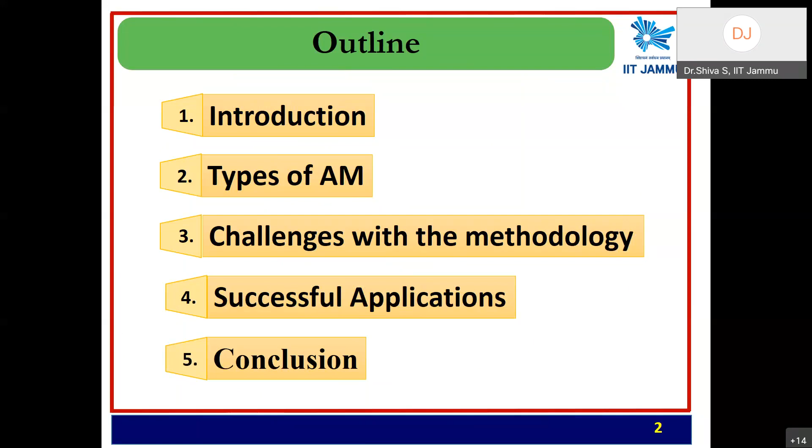So, to shed some light on this particular aspect, first I will be starting with an intro and the different types of AM which can be utilized, the challenges with the methodology, successful applications which are going to invite industries towards additive manufacturing, and finally the conclusion part. So generally in manufacturing, if you check, this is the normal design flow chart, or the design process chart in other words, which has been conventionally used by several industries for decades.

So when you say industries for decades, initially, once the industrial revolution started, slowly lean manufacturing started to take place, like effectively utilizing the labor, and basically the industrial revolution initiated. Much focus was provided not only on the technologies to be deployed for development and the products being used as output of that effort, but also sincere efforts were put on standardizing each and every method.

For example, if an industrial unit is there, there have to be certain principles and certain protocols to be followed. Anything related to these principles and protocols gave birth to this sort of process chart, where a new prototype is to be introduced from the industry. First, there will be detailed market research; it has to have clear-cut information about the customer's demand, what are all the types of expectations from the customers.

And after deciding the types and the demand, the next thing will be how hot that particular market is. It is not that we have certain requirements, we fulfill them, and we reach a dead end immediately, because when an industry is being established, it is a paramount effort and a huge money investment comes into the picture. So the first principle will be time is money. Whatever time they have, they must utilize it effectively without much wastage. That is point number one.

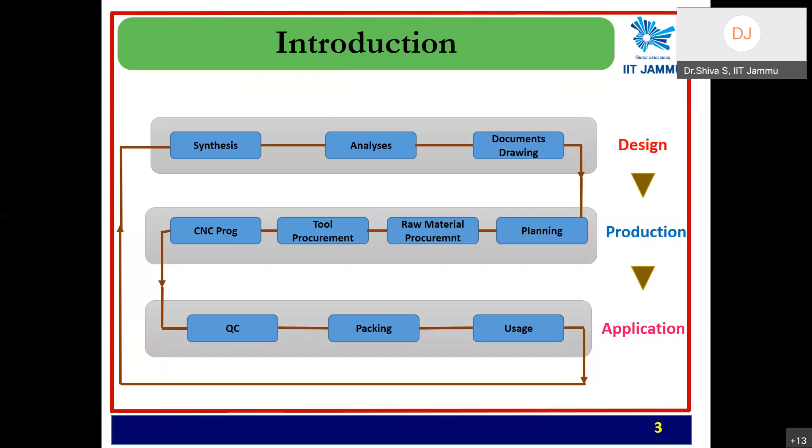So once you bring in additive manufacturing, out of these 10 steps, you will be surprised to know almost half of the steps are getting skipped. So this is a huge success for any industry, because we are not skipping these steps by compromising their job, but with the existing 5 steps, the steps which are cut short are also taken care of then and there, so that will save time, save raw material, and also save the overhead cost in the form of manpower.

So this is where additive manufacturing started taking the world by storm, and this is where a true justification was provided for utilizing additive manufacturing at an industrial level. So that is the point where the new revolution started taking place, it can be said. So once that is done, okay, how can this be done?

For example, in the case of additive manufacturing, the synthesizing job and the analysis job can be done by the design team initially with their CAD drawings, and immediately they can generate the CNC program, that is the G codes, which is used for printing an object. And all these selections like tool procurement will be off the show, raw material procurement and planning, they need not wait. It is all like fire and forget.

Once they order any bulk set of raw materials which has to be stacked, that is a periodic process. You need not go for raw material procurement for each and every segment. That will be part of a continuous flow.

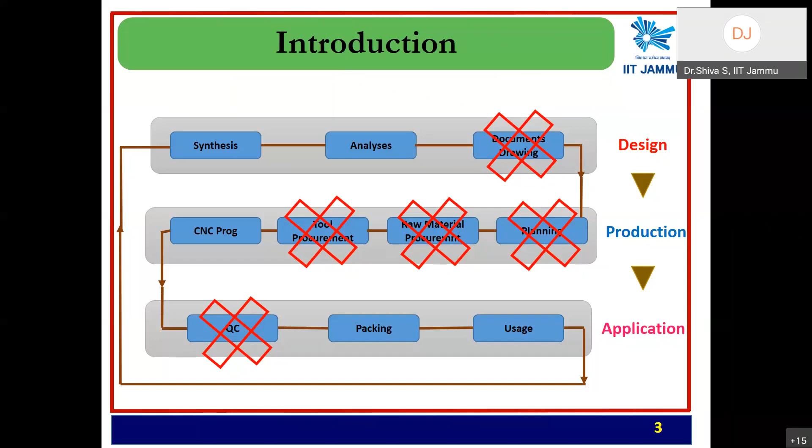And there is no requirement for any sort of drawings with BOQs and other details, because the drawing itself can be customized at any point of time just by altering the program. So this is how sequentially the cutting short of steps in the conventional design process chart came into the picture. And as an effect of those steps being taken out, we can see how this is being deployed in application successfully.

Once this is done, we have to check what are all the basic facilities that we need to utilize while using this additive manufacturing, or rapid manufacturing. We need a proper high power laser, which is basically a CO2 source, Nd:YAG source, diode source, or fiber source. And then comes the material feeding system, wire feeder and powder feeder, followed by a CNC workstation, which is 3-axis or 5-axis.

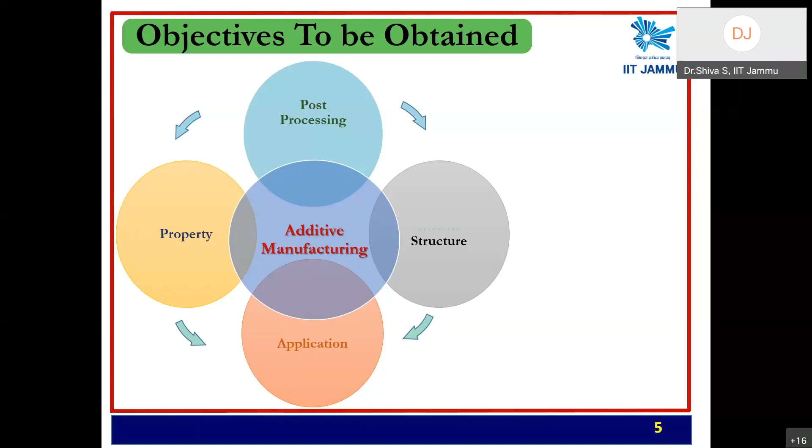Because this is the success of this particular process. Unless this is done, it is not easy to leave the shop floor. And finally, application—so this is all interrelated with detailed analysis, and each segment has to be met.

Mostly, preferably, we have to go with spherical powders, ensuring they have a good packing density. This packing density will be essential and helpful when building any component which is porosity free.

If you are precisely aiming for porous components, that is a different story—you will concentrate on the strength and weight ratio, which has to be comparatively low, and then go for a porous structure. Apart from spherical, there are also irregular shape powders and flake type powders.

In 3D printing powder fabrication, the engineers mostly focus on utilizing spherical powders, and the methodology in which these powders are fabricated also plays a crucial role. Generally, gas atomized powders are used, in such a way that more spherical powders are obtained from the raw material.

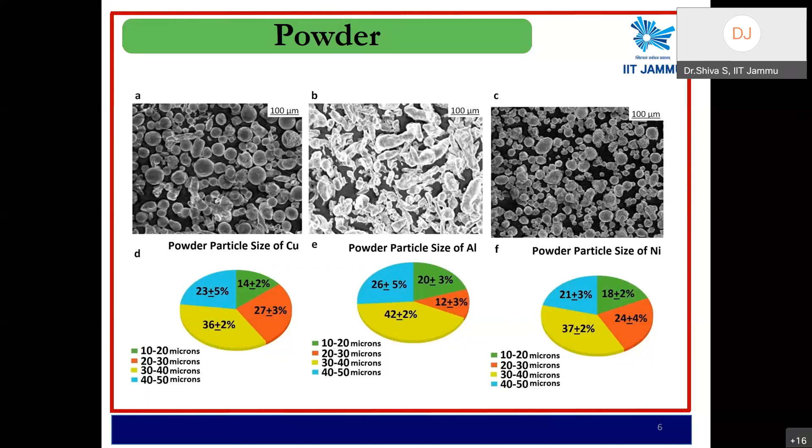In order to improve this percentage, you have to ensure the scanning speed and the feeding rate are optimized such that they work along with each other and maximum deposition is possible. This is one way of choosing the powders.

Next comes the concept of alloying. When you talk about solidification of structures, you have the powder particles, the heat sources are impinged, and depending upon the absorption coefficient and reflectivity of the powders, a particular percentage of that heat source is obtained within the powders.

This absorption and the eventual transformation of heat along the powder particles leads to the melting of the powders. This melting process is where the Marangoni effect comes into picture, and a proper melt pool is formed.

This melt pool has to sustain for a while in order to provide adequate nucleation process, which will be the step for the birth of microstructures.

It doesn't mean that once fabrication is done without proper alloying, there's no point in going for this sort of 3D printing — but obviously you cannot expect the strength. Of course, sintering-based works are also being done and they are promising in achieving certain strength.

But alloying a component, mixing with the composition, or varying the experimentation with the composition, and as a result tailoring the composition — what is the change in the property. This sort of analysis and flexibility in engineering the nature of the component may not be available if we are not providing sufficient heat and sufficient scanning speed.

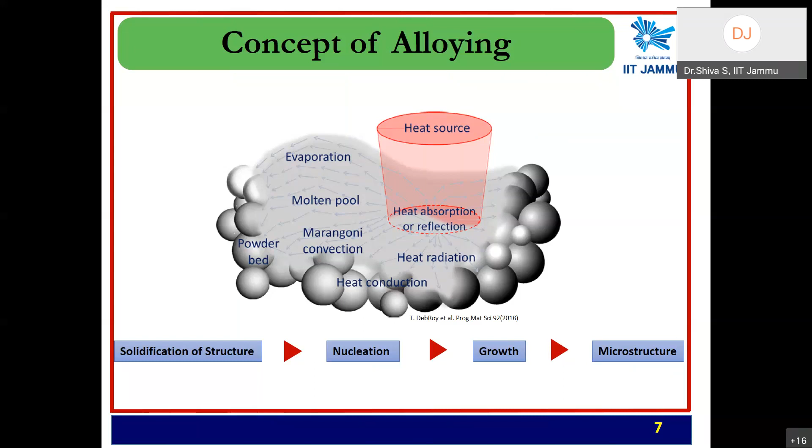That will eventually determine the final microstructure of the product, which is the first source for whatever property we are expecting. This is how the complete engineering of the microstructure, and these are the steps deployed for this work.

Now that we have decided the types of AM and discussed the alloying process utilized by AM, what are all the challenges or barriers that create hindrance for us to achieve our goal?

Loss of alloying elements is something that happens when we are not homogeneously mixing the alloy, or if two or three elements are clubbed together to form a particular alloy — the percentage and composition of that alloy varies depending upon the nature of the flow and the process in which the powder meets the heating source. So loss of alloying elements is always possible in any additive manufacturing technique.

Followed by porosity and fusion issues, because there might be certain elements highly sensitive to oxidation in the surface atmosphere, and these oxide gases get entrapped within the solid structures, eventually leading to space and voids, which might pull down the quality of the product.

Once alloying and porosity are attained as per requirement, the next challenge is surface roughness. When there is too much surface roughness, the crack propagation point starts at that particular level itself, and if we are not addressing this issue, lots of surface cracks and delamination effects happen during the alloying process.

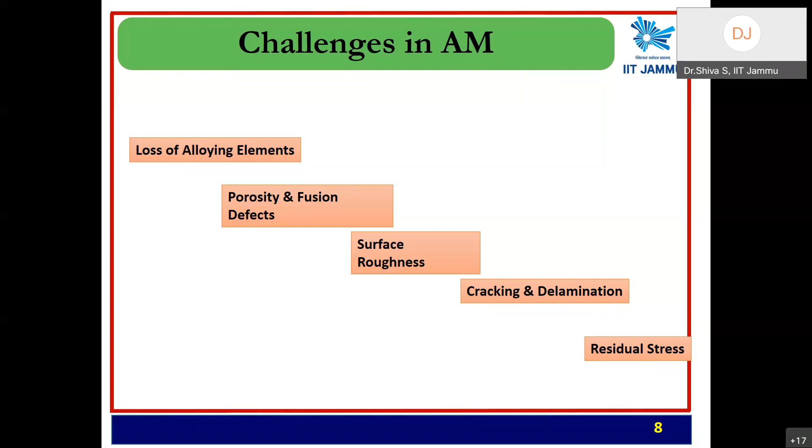Also, since the laser tracks are frequently induced or impinged on the deposited layers in a layer-by-layer process, you will find a rich accumulation of residual stress in the alloying element.

This is the conventional DED technique, a laser additive manufacturing technique, where co-axial feed powders are utilized. It is passed through the hopper, as you can see in the top left image, initiating with a dual powder feeder. This dual powder feeder facilitates the alloying of the final product, either in the form of two pure powders, or you can go for a pre-mixing process, where you alloy them using ball milling or a tabletop pre-mixer, with the powders pre-alloyed before feeding into the hopper.

Once this feeding process is done, once you pour it into the hopper, you will find that argon gas is gushing through the hopper. This argon gas is not only acting as a carrier gas, but also, once you shift the powders from the hopper towards the deposition booth, any chance of contamination and any chance of oxide formation of the powders will be efficiently prevented.

So this is how the process is initiated, and the powders are fed through the tentacles shown here in the video, the metal tentacles. These tentacles are directly connected with the powder feeder, and the argon gas is acting as a carrier gas as well as a noble gas, creating a controlled atmosphere.

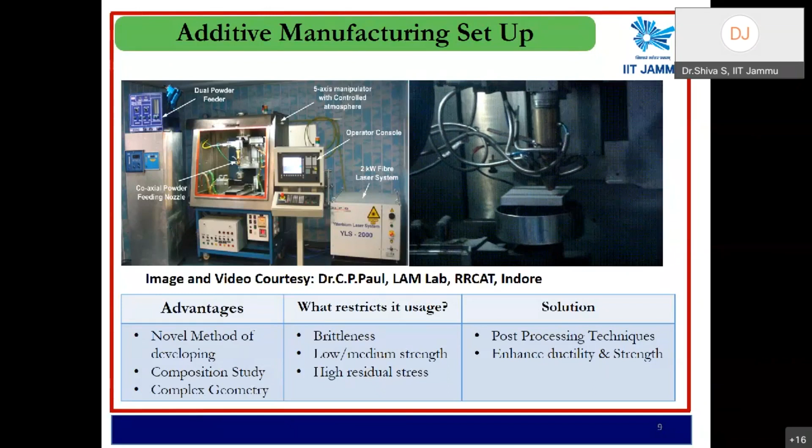See, actually, there are two things we can see here. I will tell you when you see this particular metal. In this powder-based technique, either direct energy deposition or SLM, there are certain requirements, like the previous participant asked, if you need to build implants, implants are widely made with porous structures with adequate strength and light weight, because when you're pushing an implant inside your body, it doesn't mean that it should always cope up with the weight of the body. So we are forced to build porous structured implants to meet up the application. So when you need porous structures, laser based applications or laser based deposition techniques are much more efficient and easier to fabricate the porous structures.

Whereas the wire based one is widely used for bulk structures. For example, if an object has to be deployed, if you are going to replace an object which is conventionally manufactured and forged, and you're looking for some sort of replacement in that particular application, there you need almost zero porosity to be tolerated. You cannot tolerate much porosity, because once the load acts, that itself will initiate the failure. So to prevent that, when we are going for bulk structures, we can obviously go for this wire-based additive manufacturing technique.

And second point, like you said, raw materials and green manufacturing. Slowly, the world is moving towards green manufacturing. In green manufacturing, wastage should be less, and maximum utilization of raw materials is motivated. So for this particular objective, wire-based works are much more efficient than powder-based works. So these are flexible options. It's like a buffet. It's up to you for your application, which one you are going to opt for.

Well, actually, in this wire-based technique, the material is deposited by a welding technique, I think. A welding source is used. It is not precisely welding. See, when you say welding, this is a good question. So basically, what is the difference between welding and this 3D printing? That's what you're asking, am I right?

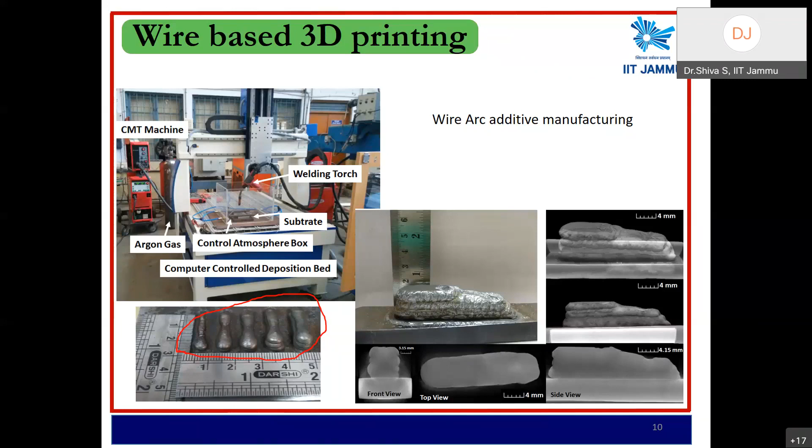So going ahead, we will be finding the spraying technique. This is a novel method which is fascinating many users. Spraying, as I said, is widely used for surface modification in the aspect of coating, and these coating techniques alter the surface of the product efficiently for corrosion resistance, wear resistance, and to improve strength, like diffusion based coating such as plasma nitriding.

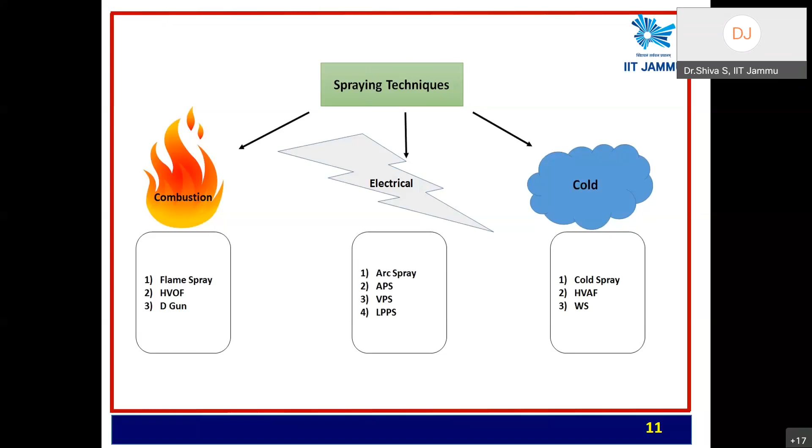So what is this de Laval nozzle? How it functions is, it is nothing but just a compression and expansion nozzle, a normal compression and expansion nozzle. But you will be really surprised to know that this small compression and expansion nozzle is creating such huge magic which other conventional manufacturing techniques are not able to meet up with.

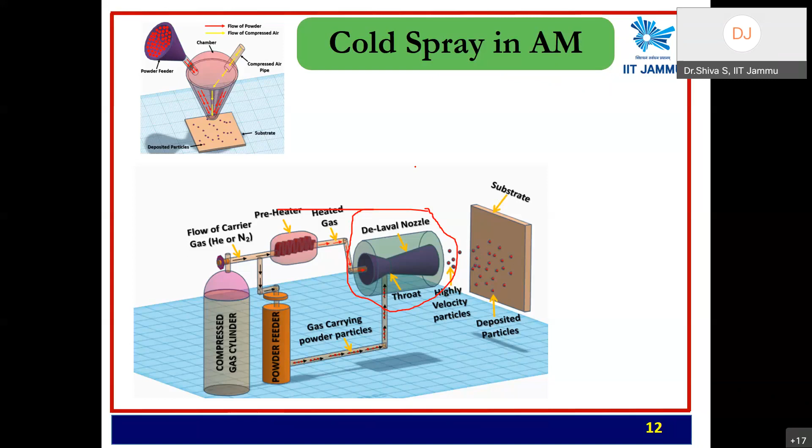So our objective is not just to impinge the powders. We have to create an alloy. Unless we create an alloy here, you are not going to have the material property that you are looking for. You get the point. So this particular technique is something you will be utilizing with a further heat treatment process. Like this is an actual setup.

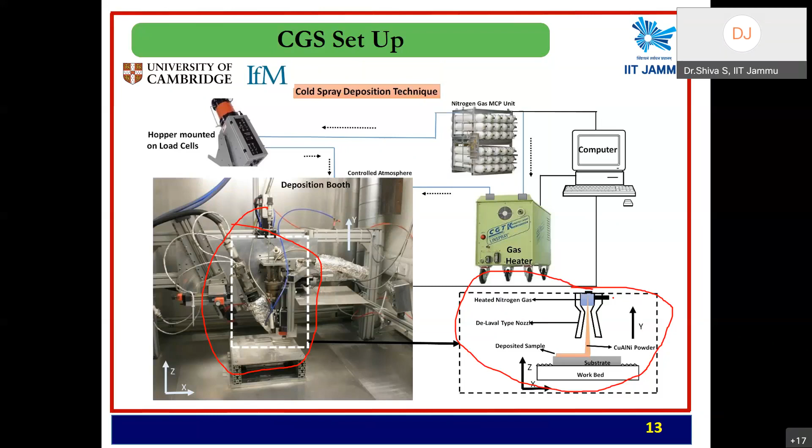You have the nozzle and you see this black input where the powders are efficiently fed in. As the nitrogen gas heats the powders, you see the expansion taking place in a much more efficient way. And as this expansion prolongs, you will find that efficient track deposition is taking place layer by layer. So this is the schematic diagram of the de Laval nozzle being used.

So it is basically a convergent type where the powder mixed hot particles are compressed with nitrogen gas and fed along the converged side of the nozzle. And as they pass through the throat, that is the point where the maximum amount of compression that can be built up by the gas is being fed into the throat.

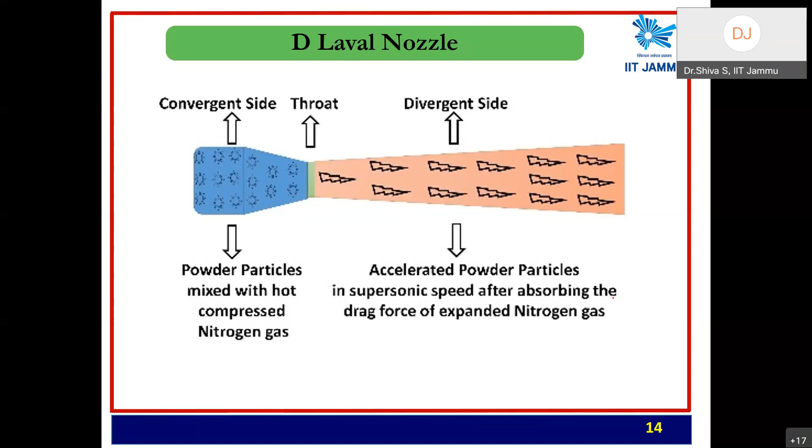And immediately after the throat, you find the divergent section where the actual acceleration of particles, that is the expansion of the gas, nitrogen gas, generates the kinetic energy, and that particular kinetic energy gets drifted on the powder particles, and that acceleration eventually assists in impinging and coming out at that high speed. You can see. So this is what again and again I'm saying, that the high speed at 2.1 Mach is the point where actual success lies.

Unless you are meeting that maximum speed, the impingement of powder is not going to be as easy as it is shown here. So to have that impingement done much more efficiently, you have to ensure that the standoff distance between the nozzle and the substrate is optimized.

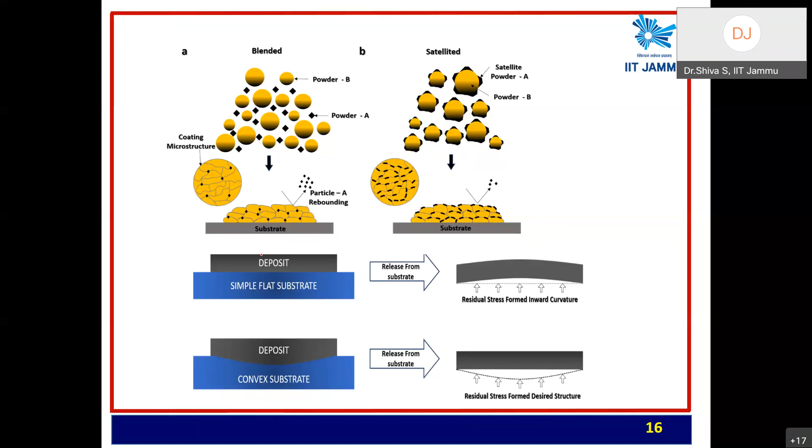Of this cold spray, you can see the tracks here as shown, with various angles, the number of tracks being deposited and their dimensions. You can see this here - the dimension is such a way that they are almost very sharp by nature.

You can see, if it's 20 mm per second based deposition, you find it here - the peak is very, very sharp, almost like a perfect triangle. If you have this, the biggest drawback is that you will not have sufficient overlapping successfully done. So what happens here is you have to ensure that this meniscus formation stays as low as possible for efficient track deposition. That is where the speed of the powder, like 200 mm per second, comes into play.

Now next comes the angle of inclination. So when we have a proper angle of inclination, the meniscus formation is supported. All this is also a type of optimization which is done, and this can be done either way. You can see the image at the bottom here.

It is an as-fabricated component, and you desire to have these two extra machined attachments here. So how do we do this? When we want sharpened edges like this, what we do is build the actual structure plus some extra deformed structure, so that by further post-machining process, we can remove that undesired section with the deformed shape, and the actual desired shape can be easily obtained. But this doesn't mean that once fabricated, you can directly utilize it in the application - if you do that, you will have the biggest disappointment, because the object will not function, since there is no alloying at all taking place here.

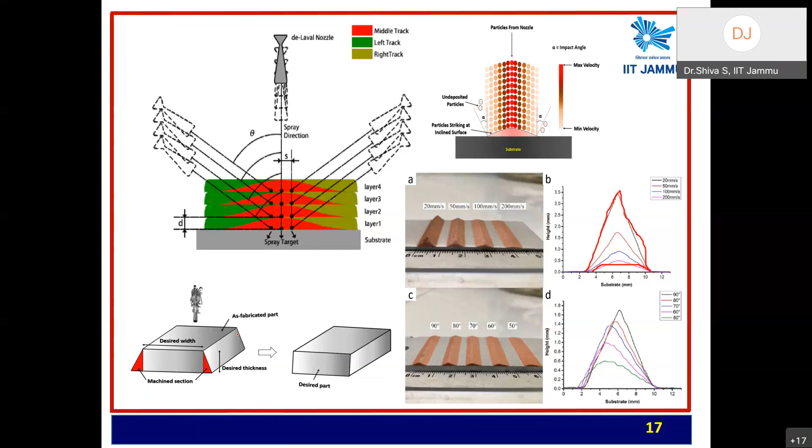Next comes the pattern of deposition. The pattern of deposition can be bifurcated. This is very common for all types of additive manufacturing techniques, whether cold spray based or laser based. You will find these techniques are either unidirectional deposition or bidirectional deposition. This unilateral and bilateral deposition basically justifies the amount of residual stress that each track deposition has, because you cannot allow too much residual stress to accumulate between each track, as that itself will motivate debonding within the tracks. So in order to avoid this, you must ensure that the track deposition you are opting for is unidirectional or bidirectional based, and that cross section has to be analyzed so that efficient deposition can take place.

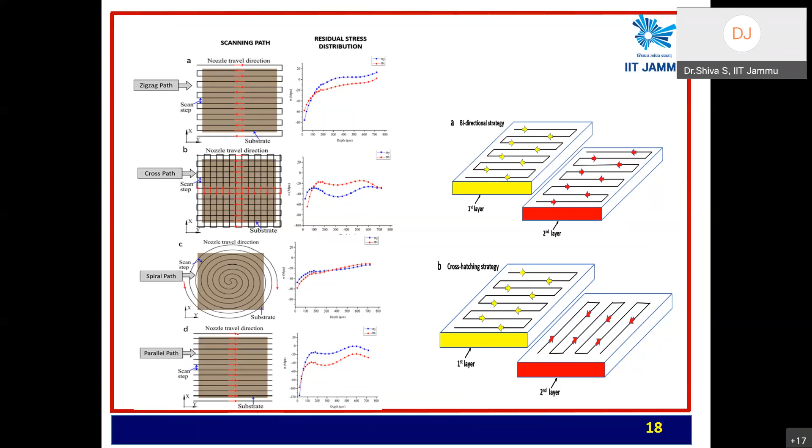When you come to this cross hatching B option shown here, you can see the first layer is a bidirectional deposition, and the second layer is also a bidirectional deposition, but the pattern is different. All these attempts are basically done to ensure that the deposition is done without any porosity or void formation, but with high packing density. So these are the ways in which you can maintain high density within the object.

So this is the difference between the types of de Laval nozzles used for spraying guns in the process. These process parameters are the widely used process parameters in and around cold spray for efficient deposition to take place, and this comes into play in case of industrial applications. All these applications here which are used, you can see, are higher end applications which take lots and lots of painstaking effort to fabricate.

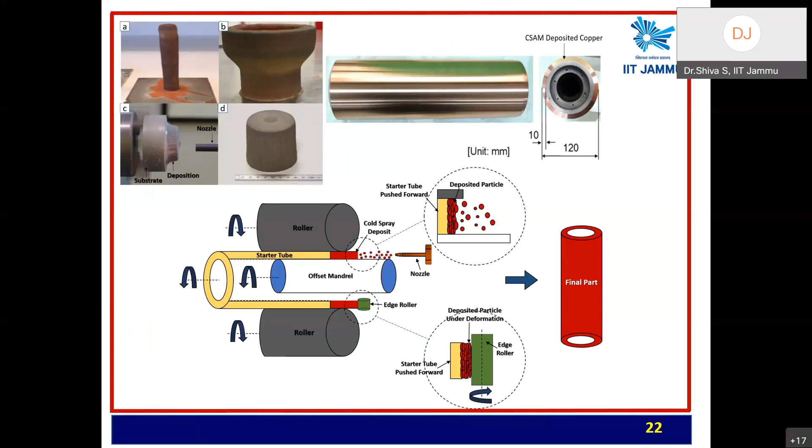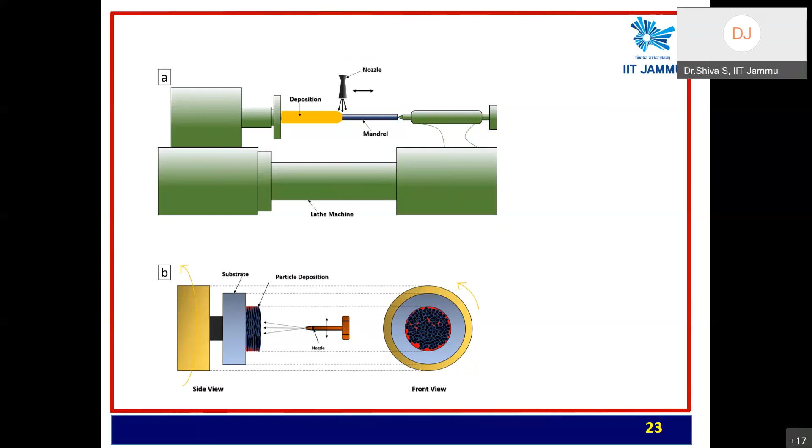And similarly here, building structures using a lathe-based setup, where the component is fixed and you have the spray gun positioned at various angles, and the entire setup functions accordingly. Even though it operates this way, we will be finding that the enormous pressure impinged through the nozzle will not allow wastage of powders to take place.

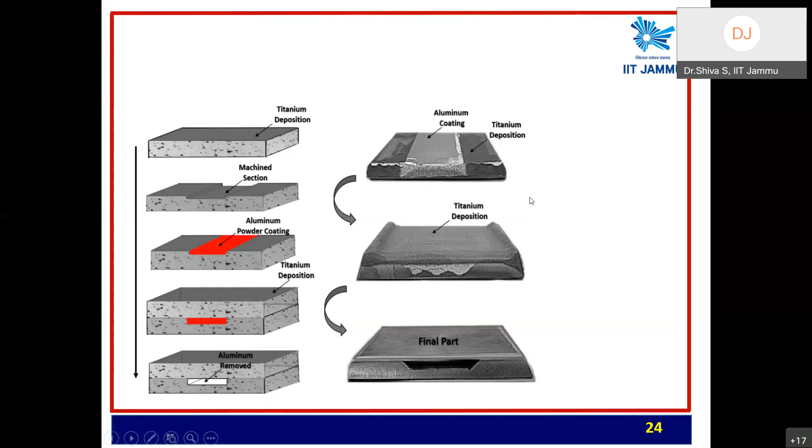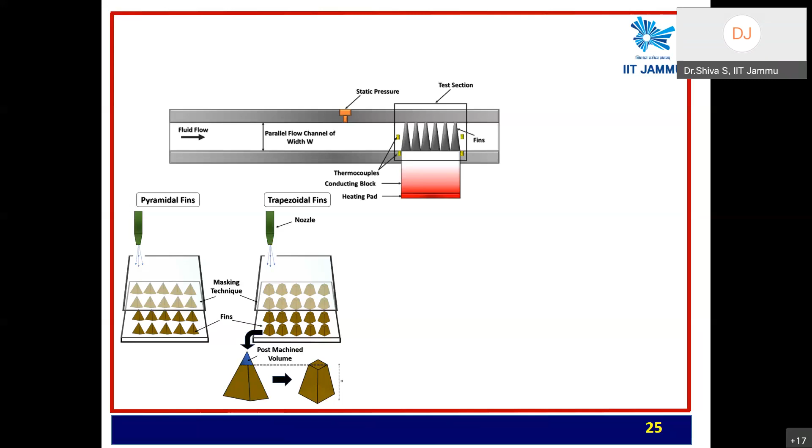Apart from this, yes sir, what is the temperature required, like the temperature that is to be achieved?

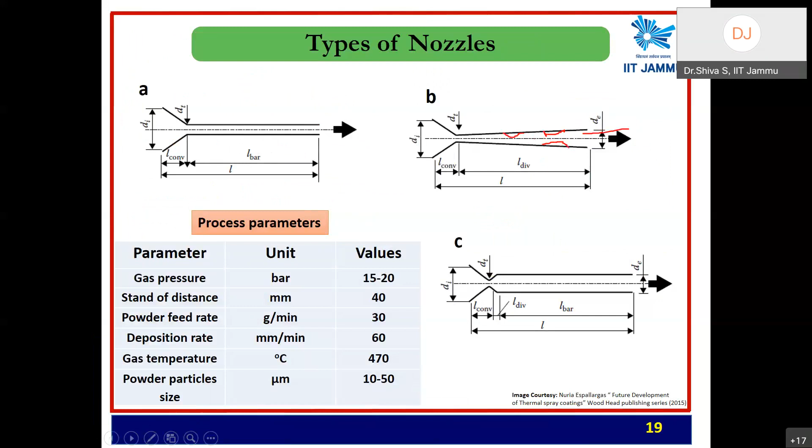The thing we have to ensure is that once you are depositing using the deposition gun with the de Laval nozzle, when using the gas, we have to ensure that these powder particles completely melt and get exhausted out of the gun. If we allow improper heating, the powders will start to clog inside the nozzles, and that will not allow free flow of powder. This clogging effect will take place. So we have to ensure the gas temperature chosen not only melts the powder, but also that the transportation from one point to another happens very smoothly and swiftly.

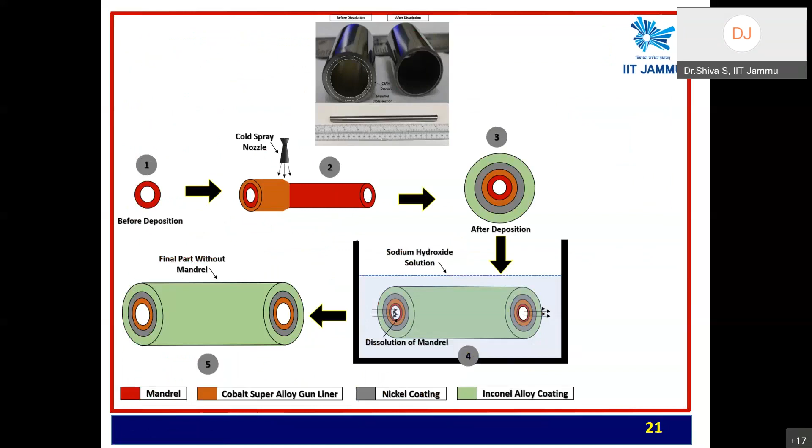Have I answered, sir? Yes, sir. Thank you, sir. Thank you.

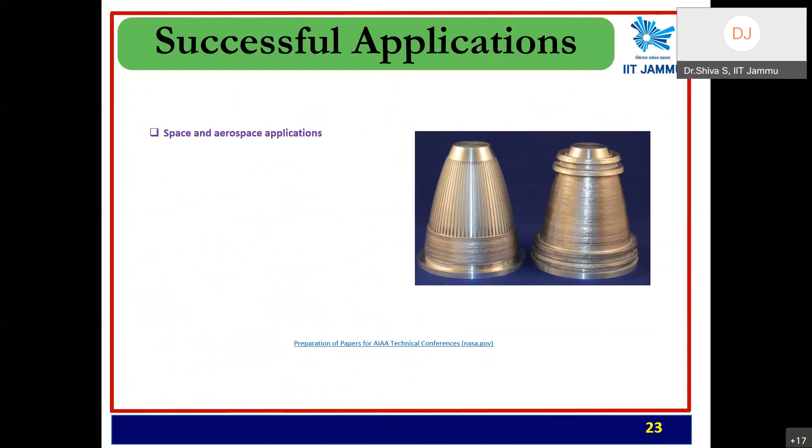Space and aerospace applications are widely used. You can see propeller nozzles used for space applications, which are completely manufactured using cold spray. Tool and mold making is another area — for casting, you have to make a lot of molds, and those mold-making machines are also done using cold spray based additive manufacturing.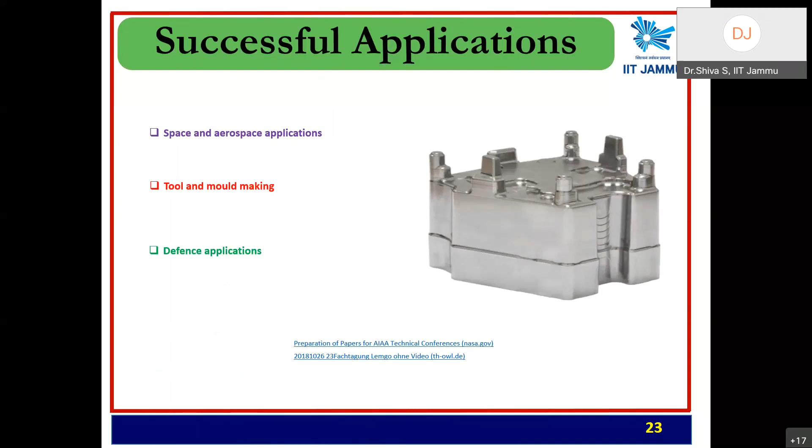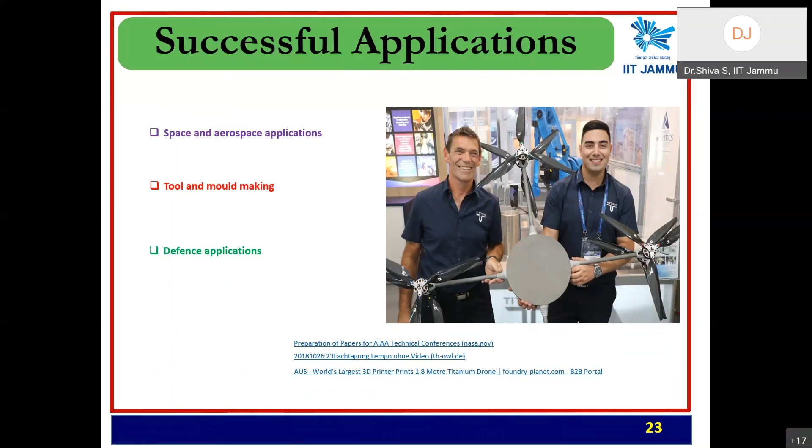In defense applications, cold spray based additive manufacturing has been successfully utilized for making drones. These drone structures are used for surveillance in defense applications, and also as permanent magnets. These magnetic structures are used to chuck two parts much more efficiently compared to normal couplings used for joining pipes. So these permanent magnetic materials are also much more efficiently 3D fabricated using cold spray based techniques.

This is one such work I would like to show — shape memory alloy based work which I carried out as part of my research. It is a functional material widely used for functional applications. You can see this actuation: on application of heat, the actuation takes place. The material remembers its shape and just returns to that shape.

For bulk applications, you can also use shape memory alloys for smart tool holders, where you apply heat and it starts to clamp the tool even more tightly. As an effect of clamping the tool more tightly, there is less vibration taking place, and the heat generation at the tip of the tool due to vibration can be substantially reduced, increasing the life of the tool.

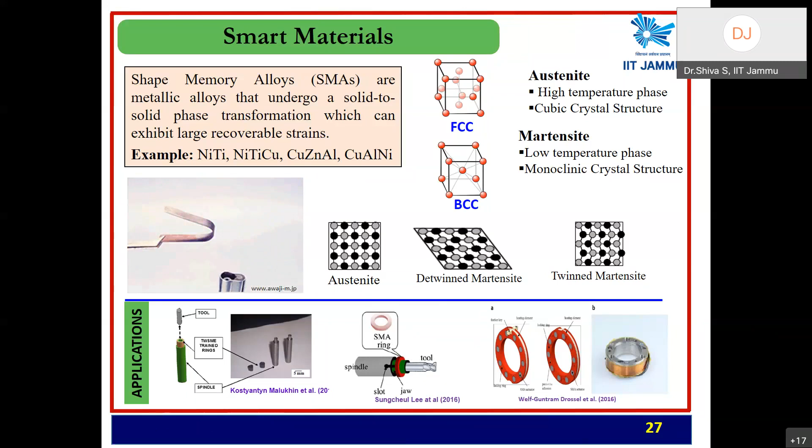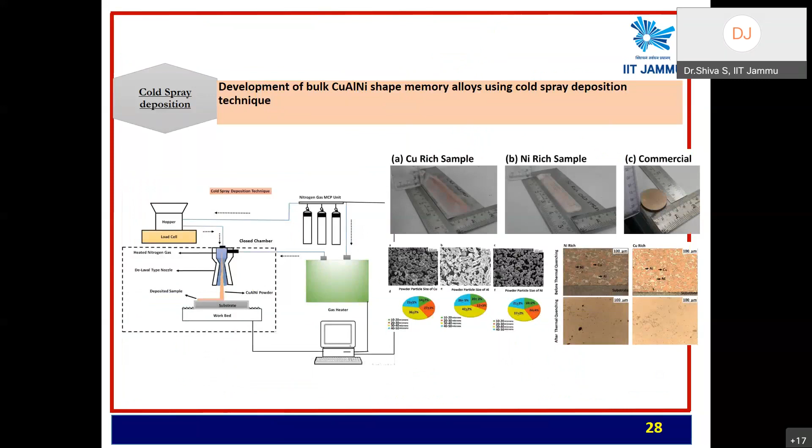These are the works done as part of my research, and these are also shape memory alloys which were developed using a cold spray based process.

Coming to the conclusion, I would say that cold spray, with more awareness, can be widely used as a good 3D printing or additive manufacturing technique. Development of standards across all types of additive manufacturing is being actively done across the world, and that is one particular area of research which can be well explored.

Developing standards will help us counter current challenges like brittleness, overheating, void formation, and defects like porosity and crack formation. All this can be prevented once standards are formed, and if we successfully develop standards and counter these challenges efficiently, there will be error-free components fabricated much more frequently, and as a result the reliability of additive manufacturing in real-time applications will be much more effective.

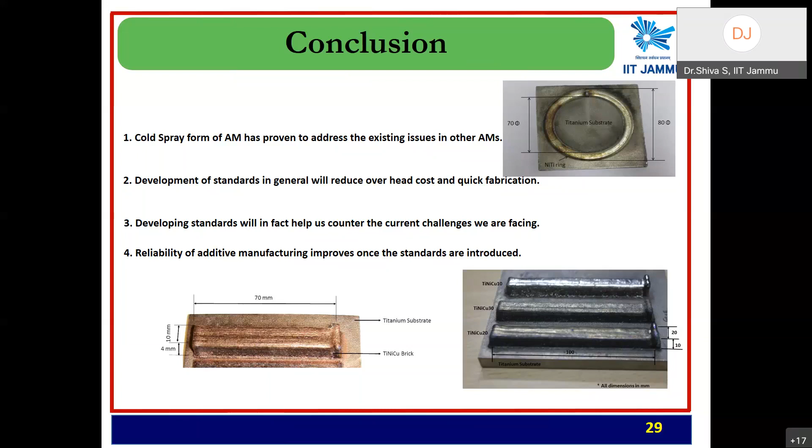So that is why we are much focused on developing standards. When you talk about additive manufacturing, this is our research lab — my research lab at IIT Jammu, the Laboratory for Advanced Manufacturing and Processing.

So here we are, soon about to have an additive manufacturing setup, a 2 kilowatt fiber laser based indigenously developed system where you can 3D print metal components, and also a cladding head where using a chuck for joining applications, the same system can be used. Similarly, there is a wire arc additive manufacturing system, CMT based, and the same laser-based system will also have a wire feeder to efficiently deposit tracks. So one machine can do 3 different roles - that is how we have locally customized these machines.

Apart from that, we use high power pulsed lasers for laser post-processing techniques like laser annealing and laser shock peening, where conventional compressive stress inducing techniques are not much successful. We generally use this sort of technique for countering such efforts.

Currently we are handling projects from ISRO, DRDO and DSIR. In ISRO, we are working on high temperature, high entropy alloys fabrication using atmospheric plasma spray, and we also use high power lasers for laser surface processing to postpone failures in nickel superalloys. In DRDO, we are using this additive manufacturing technique for fabricating certain mechanical components for their defense applications. And from DSIR, we have a project where we are developing standards for manufacturing stainless steel components for high temperature and defense applications. So these are the various national projects that we are carrying out in our lab.

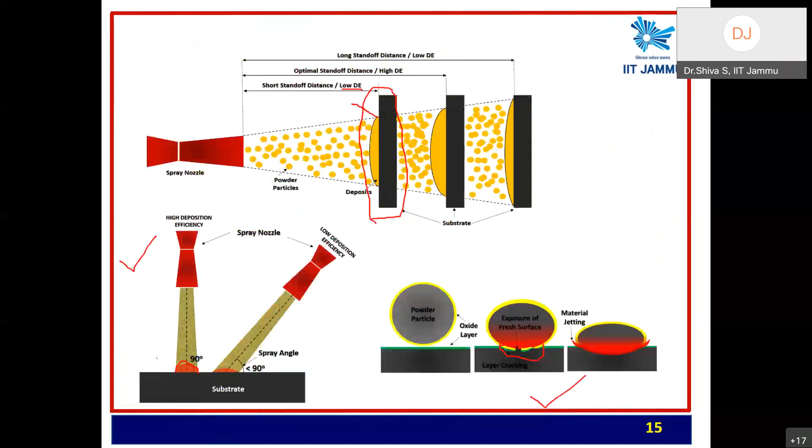Sir, I have one question. You said that in one spraying technique, we are using a mandrel to make a hollow tube like structure. What should be the property of that hollow mandrel? What kind of mandrel can they use?

That mandrel should actually be some sort of degradable polymer or composite type where it can be dissolved using alkaline acids. That particular part will assist us in removing the mandrel. The mandrel acts as a base and rotates while we develop springs and hollow tubes on the surface efficiently. Once the development is completely done, you take that sandwiched component output and put it in an acid bath. By the attack of the acids, the mandrel gets completely diluted and evaporated, and the leftover metal part is used for our application. So this is how that is done.